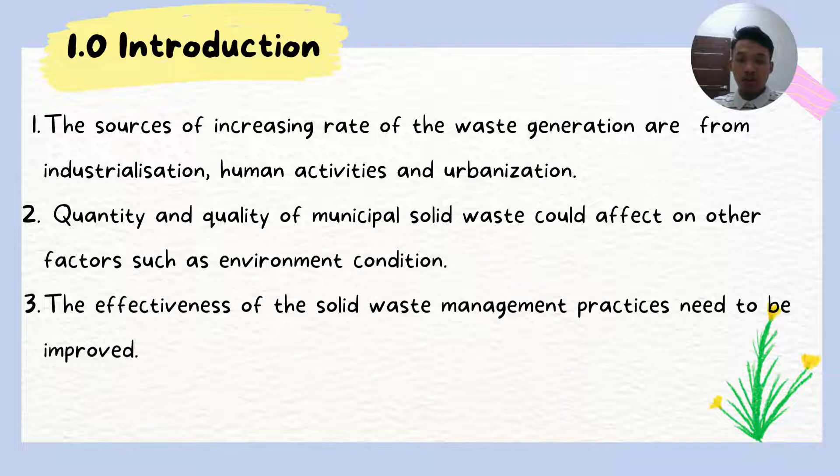Next is our introduction. First, the increasing rate of waste generation comes from industrialization, human activities, and urbanization. Second, the quantity and quality of municipal solid waste could affect other factors such as environmental conditions. Third, the effectiveness of solid waste management practice needs to be improved.

Second is the definition of solid waste. Solid waste refers to material or other unwanted surplus substance rejected from the application of any process. Second, any substance required to be disposed of as being broken, worn out, contaminated, or otherwise spoiled. Third, any other material that according to this act or any other written law is required by the authority to be disposed of.

All of these definitions are according to Act 672 under the Laws of Malaysia, which is the Solid Waste and Public Cleansing Management Act 2007.

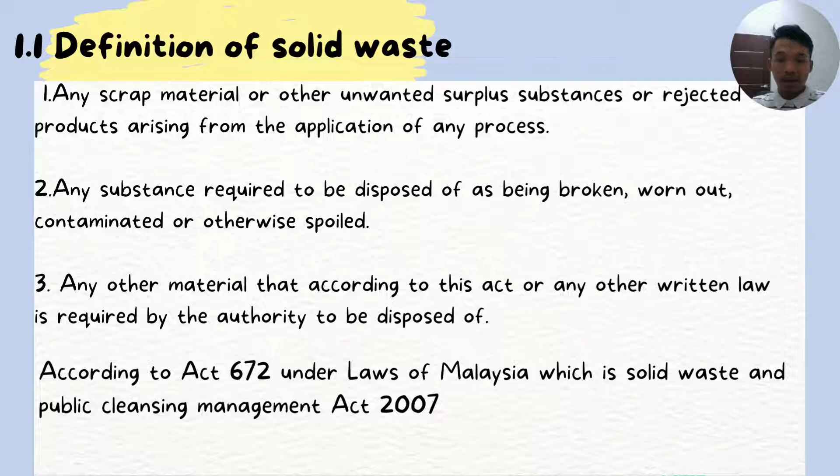Next is the classification of waste into several types. Waste can be classified into a few types: A, commercial solid waste; B, construction and demolition waste; C, agriculture and animal waste; D, industrial waste; and E, municipal solid waste.

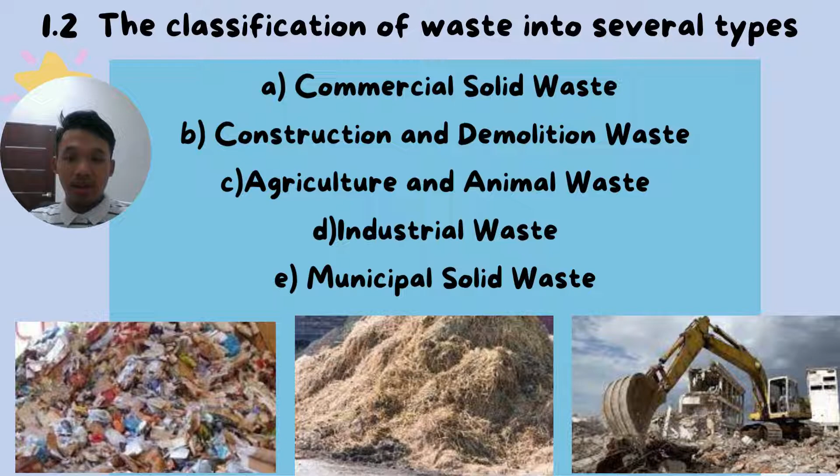So I will talk about the source of municipal solid waste and its categories. On the left is the source of municipal waste and on the right is the categories of municipal solid waste.

First is residential area, categorized by food waste, food containers and packaging, cans, bottles, paper and newspaper, clothes, garden waste, e-waste, and furniture waste.

Second is commercial centers, which are office lots, small shops, and restaurants. These produce paper and boxes, food waste, food containers and packaging, and cans or bottles.

Third is industry with factories. The categories can be divided into office waste, cafeteria waste, and processing waste.

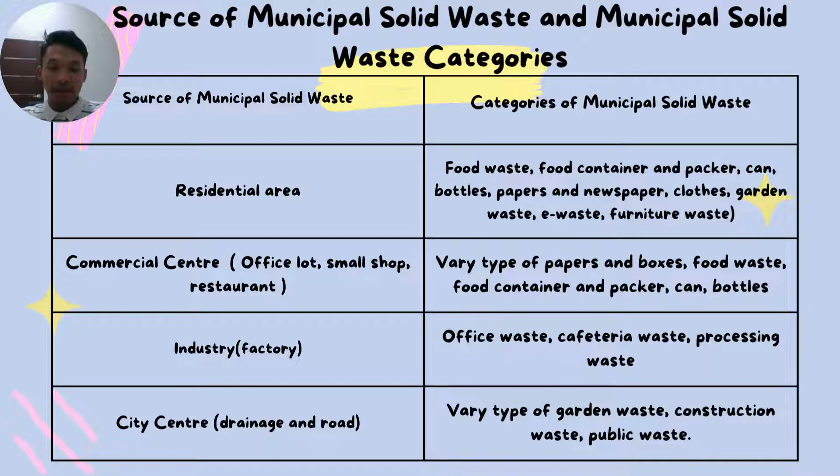Fourth is city center, which includes drainage and roads. This can be categorized into varied types of garden waste, construction waste, and public waste.

Hello everyone, my name is Nur Afiqah. Today I will present the innovation from my group. Firstly, I will introduce to you all the Multi-purpose Recycle Machine (MRM).

MRM is a new type of subcritical water reactor that processes flammable waste using high pressure and high temperature in a pressurized vessel. There is no incineration process, so MRM doesn't generate carbon dioxide, dioxin, or nitrous oxide. Odors are not generated because of the sealed process. This is very good for the prevention of global warming gases and the protection of the environment.

The resulting products are in a germ-free condition, with residual dioxins and heavy metals below government safety standards. Processing of waste takes about an hour.

It is able to recycle organic waste such as raw garbage, architectural scrap wood, organic sludge, polystyrene, shredder dust, agricultural vinyl, incineration ash, and any other flammable waste. The products obtained are usually feed, compost, and organic compounds.

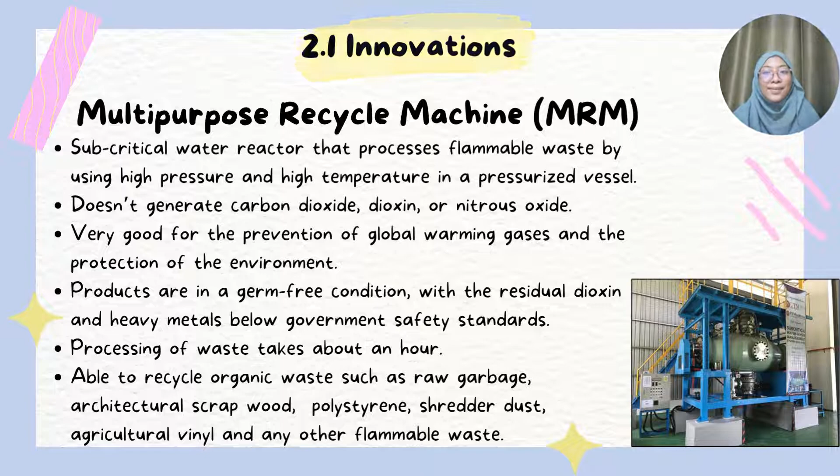Secondly, let me introduce subcritical water. Subcritical water is liquid water under pressure at temperatures above the usual boiling point, up to 374 degrees Celsius and 22 megapascals. It becomes a uniform fluid that is neither steam nor water. This condition is called the critical point.

The hot water where temperature and pressure are lower than the critical point is called subcritical water, where hydrothermal reaction occurs. Through this reaction, organic molecules such as starch and protein are decomposed into glucose and amino acids, as well as being changed from solids into liquid form.

In conclusion, this reaction is very safe, good for the environment, and obtains valuable resources such as proteins from food waste in a quick and easy process.

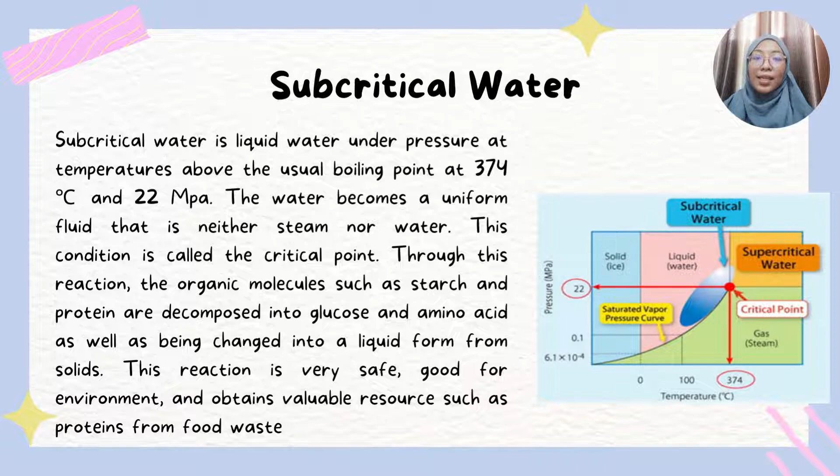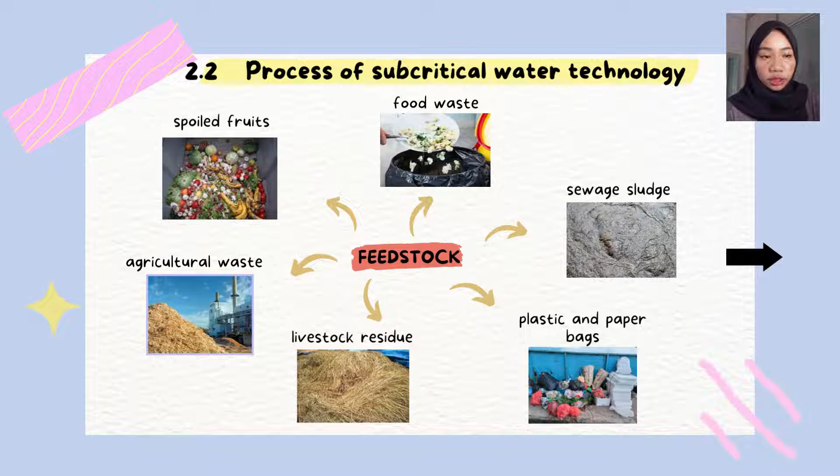These are examples of the feedstock: spoiled fruits, food waste, sewage sludge, plastic and paper bags, livestock residue, and agricultural waste. Next, the feedstock will go into our machine, which is the multi-purpose recycle machine, MRM. This machine requires a temperature between 150 to 230 degrees Celsius, pressure 1 to 2 MPa, and time of 1 hour per cycle, with a 2 ton capacity each process. After that, we obtain the product, which are feeds, compost, and organic compound.

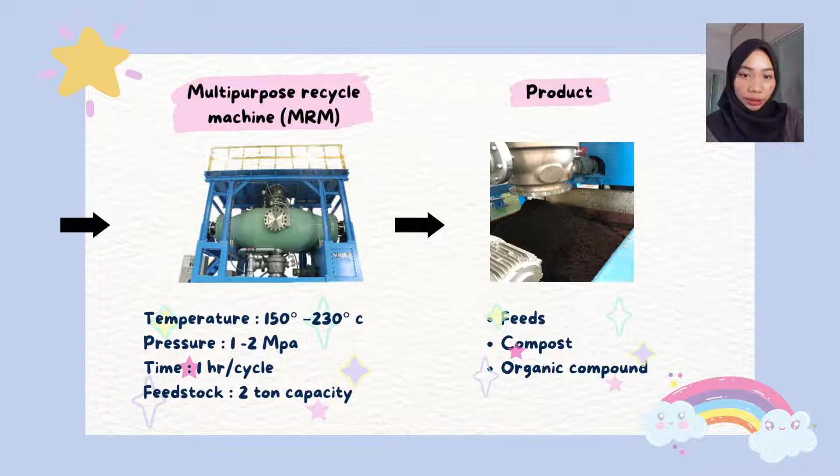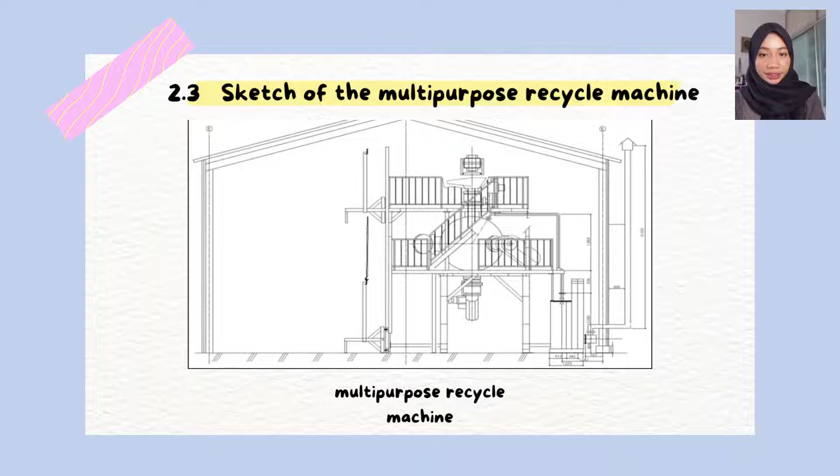2.3. This is our 2D sketch of the multi-purpose recycle machine. The picture shows the process to obtain the product. First, shredding of raw material. Next, put the raw material into the container and lift it to the top. Then load the raw material into the reactor, where it is processed using SCW technology.

SCW stands for supercritical water. Supercritical water gasification is the process in which water having a pressure over 22 MPa and a temperature over 374 degrees Celsius is used as the gasifying agent. After processing using SCW technology, we obtain the product. We then dry it until completely dried, and package it.

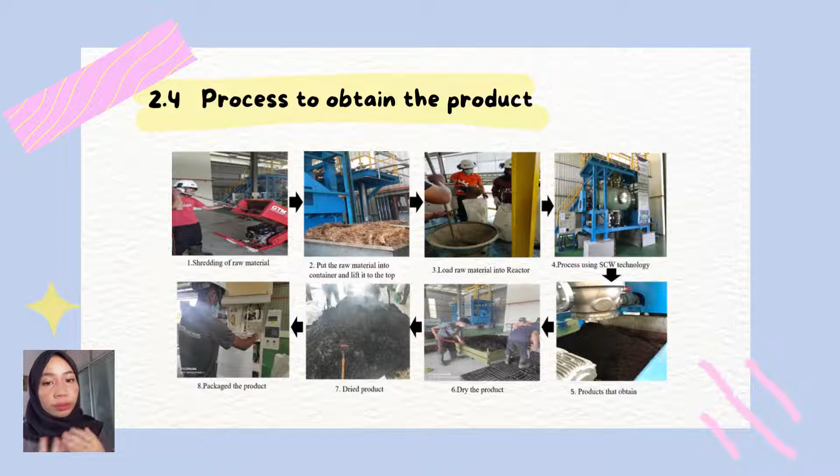Hello, I am Guan, and now we talk about the SWOT analysis. For the strength, we have a pathogen-free product, zero waste concept, environmentally friendly, zero greenhouse gas emissions, zero odor, and cheaper processing fee. For the weakness, the technology is not well known in Malaysia. For the opportunities, we can change the waste management method to one that is not harmful to our earth. The last one is threats, which is the competition from other countries like Japan, which have more advanced technology in waste management.

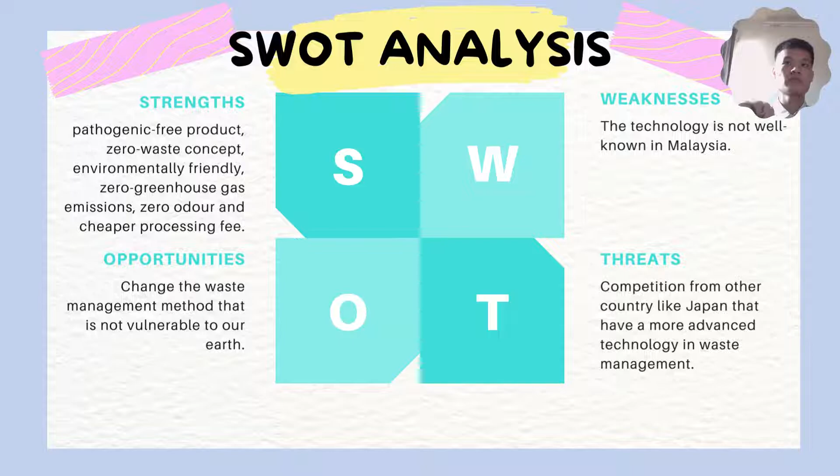Now I will talk about the business strategy. We will introduce our product to our target customers, which are home Malaysians, to use our waste management technology and our product from the process, which is fertilizer, by showing them our product's strengths on social media like Facebook, TikTok, Instagram, and television shows.

We also will do some roadshows at shopping malls like Pavilion to do demonstrations for the public. Other than that, we will do a series of promotions to attract customers and increase our reputation. Our team will also find a chance to collaborate with local farmers so that our product can become the main choice for Malaysian farmers.

Now we have a cost analysis. We have two categories: variable cost and fixed cost. For the variable cost, we have packaging, electrical power, and transportation, totaling 85 cents per unit. For the fixed cost, we have marketing advertisement at 300 ringgit, management and administration at 3,000 ringgit, business registration and fixed tax at 500 ringgit, and the multi-purpose recycle machine at 5,000 ringgit.